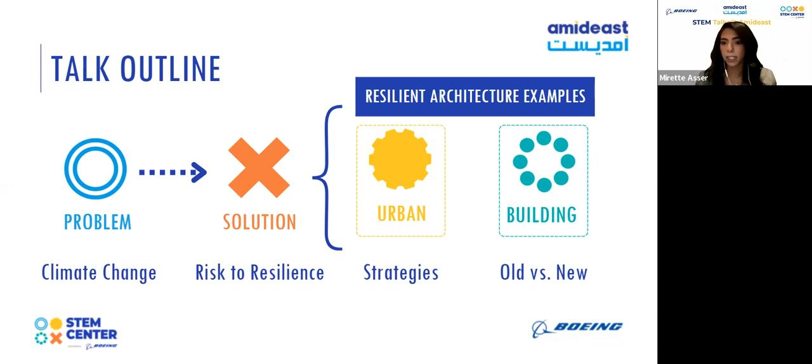Before we begin, I want you to imagine something with me. Imagine that you're stranded on an island, and this island is self-sufficient - you have water, you have food, and you have a shelter above your head. As time goes by, the water starts to get inside the island, it starts to devour at it, to the point where one day you walk out and your ankles are submerged in water. This is a very simplified metaphor of sea level rise due to climate change. It's not as harsh as I make it sound, but it's also not that far off from reality.

Let's take this mental image and put it in reality. We have coastal metropolises around the world - New York City, Sydney, Venice, Mumbai, and not even far off from here, Alexandria. These are all beautiful coastal cities, and as much as they all have amazing views and are heavily settled with a lot of people living around them, they're also threatened by climate change induced sea level rise.

So I want to ask you a question: do you think that all of these cities are going to look the same in a couple of years - in 10, 50, maybe 100 years? Naturally, no. But the reason behind the no is what we're going to be talking about today.

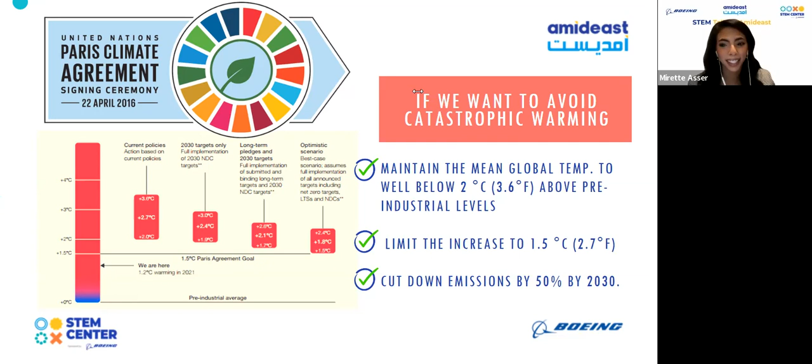Yeah, that's actually true, that's not the case. If we were to cut down all global emissions by tomorrow, we will still be dealing with climate change, because in a way some of that damage is already done and it's inevitable. That's not to say we shouldn't be heading towards more of a zero carbon or net zero type of construction — that's not what I'm saying at all. Besides, we should be doing that, but we should be looking at other things.

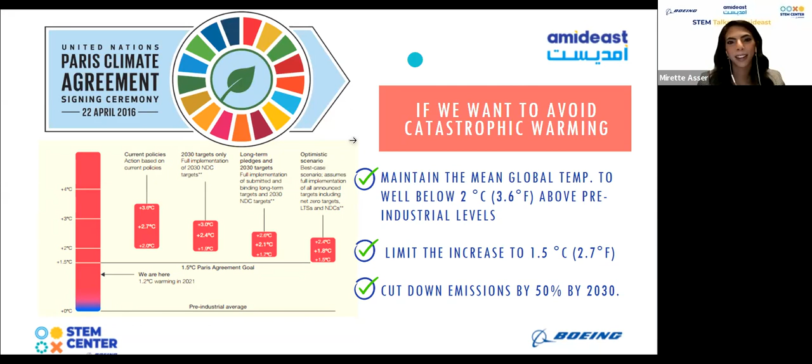So just like I asked you, the world without emissions is not equivalent to a world without global warming or climate change. So where does architecture come into that? Architecture's role in this is huge, more than we can ever imagine. The reason is because emissions are the largest contributor to the problem, and since they're the largest contributor, I can use it as a double-edged sword — it can also be the solution.

Buildings and the construction industry are responsible for three-quarters of all the carbon dioxide produced into the atmosphere. It utilizes 40% of the energy, 40% of natural resources, and consumes 25% of global water. Now if you ask me, those are big numbers. So just the building sector itself is responsible for this dilemma. But there are two types of carbon as well.

The reason they are that big of a percentage. The first type of carbon is embodied carbon. That is existent in the materials themselves. When you have concrete, when you have any type of engineered materials, they produce carbon into the atmosphere. That's just their natural life cycle. So that is embodied carbon.

The second one is operational carbon emission, which comes from the burning of fossil fuels in order to provide all forms of energy so that you can run your house. So your electricity, your water, any of that stuff. Since they already have a huge impact on the planet, we can utilize them for good.

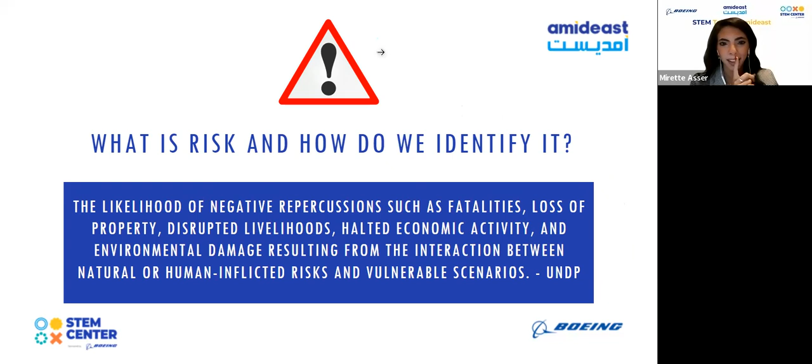Okay, so climate change is a form of risk, but we can call many things risks. Yes, you guys can all see the presentation. Perfect. Okay, so what is actually a risk and how do we identify it?

According to the UN, risk is the likelihood of a negative circumstance to occur or repercussions such as fatalities, loss of property, disrupted livelihoods, halted economic activity, environmental damage, resulting from the interaction between natural or human inflicted risks and vulnerable scenarios. So it's a mix of both. You have the human inflicted risks, the way that we live, the way that we construct, the way that we do most things that produce all these carbon emissions, and the natural causes in general.

So a natural disaster, as we've mentioned, the earth is dynamic. You have the shifting of tectonic plates, you have things that occur naturally. So a mixture of all of these lead to negative repercussions, and these negative repercussions are considered risk. Now, the reason why I'm telling you about risk is because it is a keyword to the way that we can actually solve this issue.

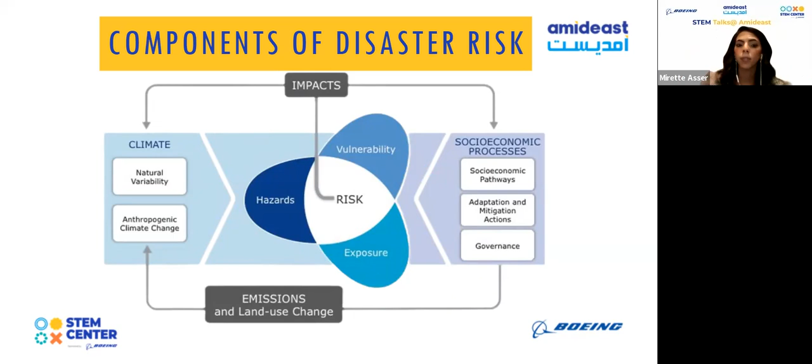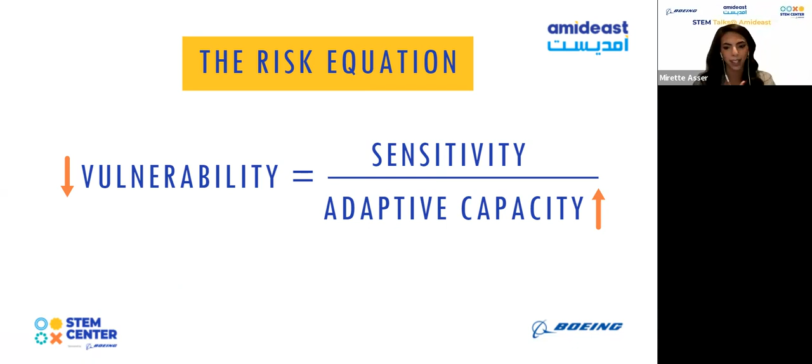And the way that we're going to be suggesting that is when we talk about it in the sense of architecture or buildings, we need to make the building adaptive or resilient. But we're going to get to that after just this mini.

So risk reduction through risk assessment. In order to really know what that risk is, to kind of grasp hold of it, you need to know how to assess it. And you do that through a set of 7 steps.

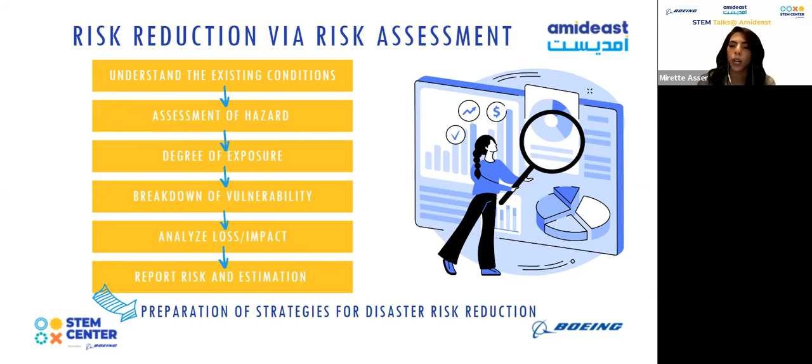You need to understand your existing conditions. So we're going to give an example of that. And then we need to assess the hazard, the degree of exposure, the breakdown of vulnerability. We need to analyze loss and impact. We report this risk and put all the estimates and statistics out there so that we can prepare for it through strategies, through planning, through design, etc.

So we're going to be giving a real life example here. Egypt's coasts are extremely vulnerable for so many reasons, but one of the main reasons is because of existing conditions of the Mediterranean coast, for instance. I'm just going to be focusing on the Mediterranean coast here.

So one of the main things that we have is low-lying lands. And by low-lying lands, I mean that they are just low in general. So if a little bit of water starts to increase, or the sea level starts to increase, it's bound to get flooded because it's already at a low elevation. We have plenty of that around our coast, and that's one of the main reasons why they're actually under risk.

So not only are they low, they are extremely densely populated. Throughout the world, throughout centuries, whenever we look at human civilization, we look at it around bodies of water because that's the natural way that civilization has come to be. You find water, that means there is plenty of room for resources and life. So we naturally put our settlements there. And as we've evolved, we have become overpopulated. So these coastal areas, not only are they low, but they're also densely populated.

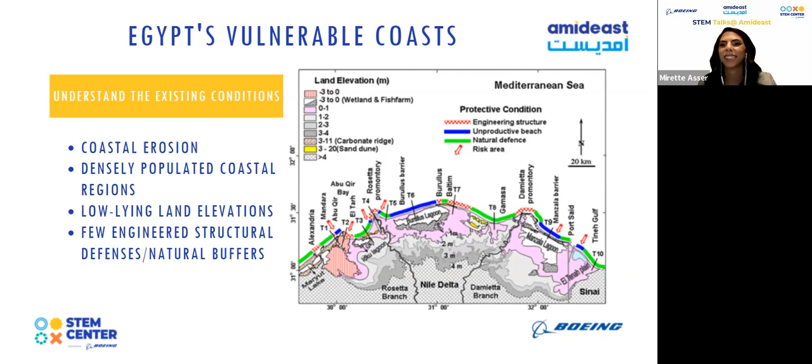And the last thing is that they have few engineered defenses and natural barriers. If you can see around this key, these are the only areas that have engineered structures, such as dams, such as protective engineering of dams or flood walls, etc.

So according to a report conducted, which identified the year 2000 as its baseline for its research, the population density in the beginning of the 21st century residing in low-lying areas was only 25.5% of the total population. But if we were to expect that the sea level rise is going to increase by year 2030 by 0.5 meters, which is actually the assumption for the predicted trajectory that most studies suggest, 45% of the population will be exposed. But if we wait a couple more, like 30 more years, then the scenario of the sea level rise up until 2100 is actually 1 meter.

So it can start anywhere around 2060 up until 2100. Those are all predictions as well, because that's the tricky part with risk assessment or with natural disasters or with hazards - you can't predict it accurately, you can't pinpoint it. So when we get to 2060 up until 2100,

63.5% of the population will be exposed to sea level rise due to the fact that they're just settled in low-lying areas and the population is increasing around these areas, these risk areas, these flood-prone areas, etc. That's almost 2.5 times the amount that was there just 60 years ago, or maybe 100.

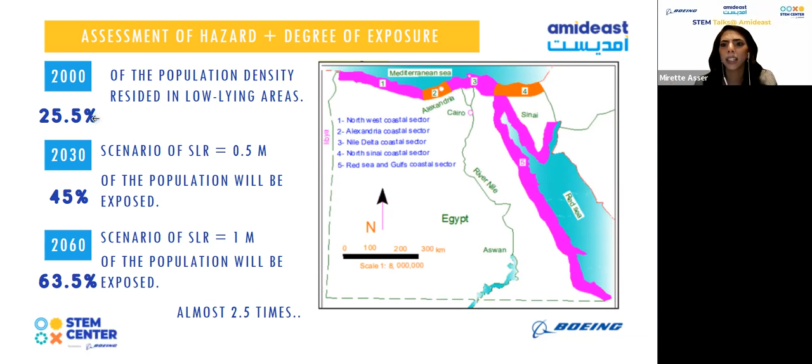Okay, so the breakdown of vulnerability. How can we say that it's vulnerable? Well, we say that it's vulnerable based on all of the things we just mentioned, but another thing is the contouring of the land itself. These are all aspects that tell us that these areas are going to be really exposed.

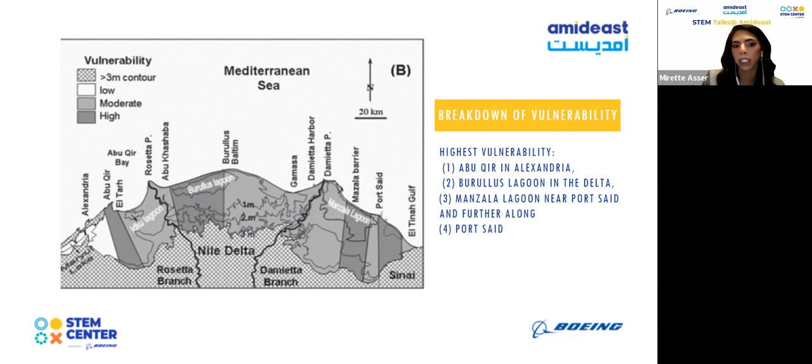But in the end, when we break down vulnerability, we're trying to give it kind of a hierarchy, or prioritizing the areas which are the most vulnerable. So the areas that are most vulnerable are as follows: Hayrat Abu Qir, which is in Alexandria, Burullus Lagoon, which is in the Delta, Manzala, which is near Port Said, and further along Port Said. Those are all considered the high risk areas. From now on, not in 30 or 60 years, they're actually under high risk from now.

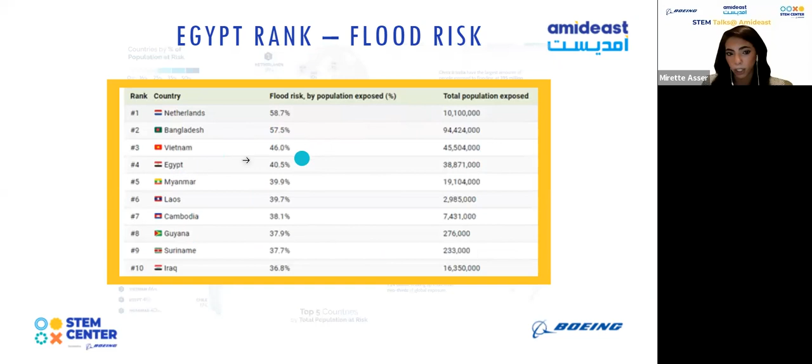Which brings us to one of the scariest statistics, but we're going to stay hopeful. The scary statistic is that Egypt ranks 4th in the flood risk parameters, 4th around the world. 41% of its population is actually exposed to flooding, which you can tell here that flood risk by population exposed is 40.5%, which exposes almost roughly 40 million people.

But that's not to say that Egypt isn't taking steps in the right direction. We've recently had the Egypt National Climate Change Strategy, developed in May 2022, set forth for 2050. The strategy promises the development of an interactive map which will aid decision makers in identifying areas most susceptible to risks, especially those related to climate change, in a more accurate way, so we can take appropriate action.

Another thing is, I'm sure all of you are aware that COP27 was just held in Sharm el-Sheikh almost a month ago, and that was a huge step for climate action around the world, because this was the first time COP was actually held in a developing country.

During this year's conference there was something called the Clean Construction Accelerator, which was announced. This is an act that hopes to support the built environment sector in halving emissions by 2030 for all new buildings and infrastructure projects, which is a great step for architectural practice around the world.

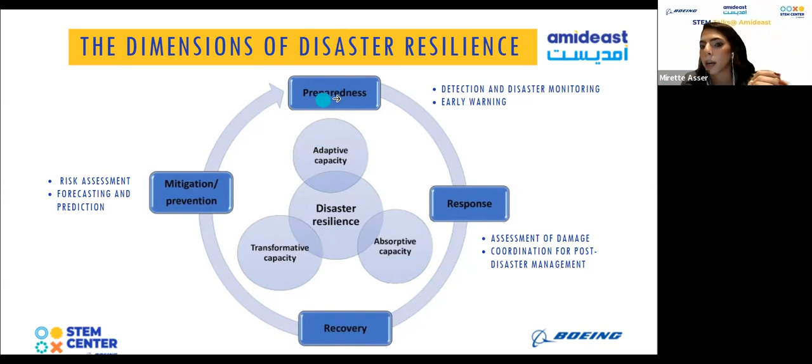Okay, so can we measure resilience? Most of the time, when it comes to the climate change research area, a lot of things are tricky to measure or add numerical value to. For us as engineers, we work with numbers, statistics, percentages, all of the above. But when it comes to something hard to predict, a lot of initiatives are actually trying to measure resilience.

This is the BRI, the Building Resilience Index. It is actually an attempt to solve this challenge. The International Finance Corporation, the IFC, has developed this index, and it's an online tool and a self-assessment framework that you can utilize.

If I have any architects here, you're well aware of rating systems such as LEED, BREEAM, or the Green Star even. That's a way of rating whether your building is sustainable or not. But the new narrative is to rate it or assess it in the sense of whether it's resilient or not.

So this online tool uses a standardized letter grade rating system to evaluate the building's capacity to stand up to shocks, and it continues to function in the sense of its structural integrity. There are so many factors. I do invite you all to actually check it out and see it - it's up online, a very interesting and intriguing system, and this would really benefit the overall trajectory towards resilient design.

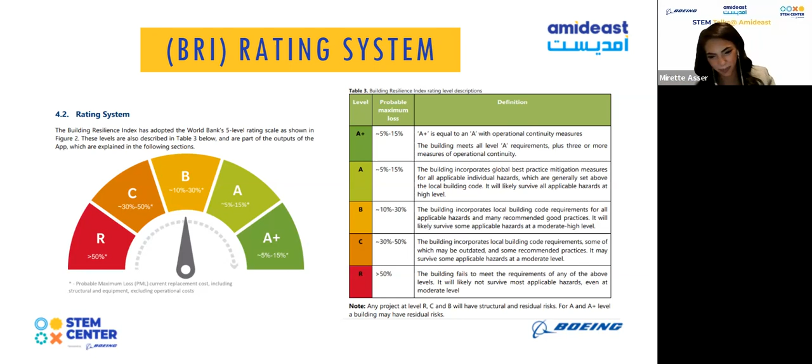Okay, so we're at the last but not least part of our talk, which is flood resilient architectural examples. There are plenty of examples - most of them are conceptual, some are in the form of strategies, some are in the form of standalone research projects. But I tried to gather as much as I possibly can on an urban scale and a building scale so that we can go through all these different examples that show us how we can respond.

The first one is based on urban scale strategies. There are 9 main urban scale strategies. When we look at this, we consider an urban area where we're still going to construct—it's a new urban development, not something existing. It's important to note that if something is existing and we're trying to adapt or implement something onto it, that means we're retrofitting. I'll be using that word a lot, especially for the building scale, so I just needed to clear that out. This is something absolutely new, a new development.

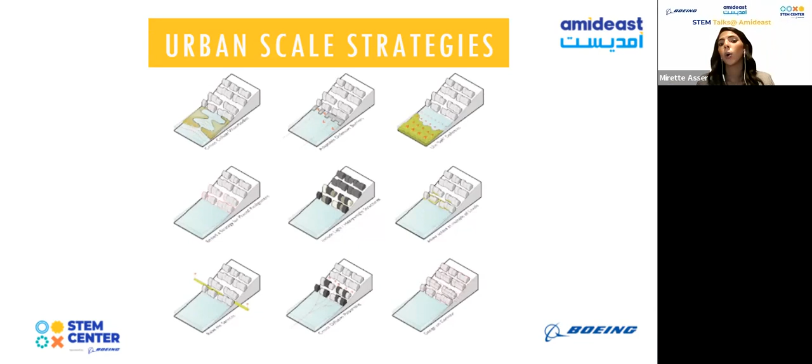So you have 9 ways in which you can protect this neighborhood, city, or coastal area from an expected flood. The first is cellular water bodies. The way to do that is to design the water itself, having an area in your land which acts as a pool. When the flood hits, it can transcend in between it. You use these blue elements to integrate them with your landscape and urban environment.

The second one is to use soft defenses. You can literally use trees as buffers. That sounds very simple, but with time, throughout my research, I realized that the simple techniques are the ones that work best.

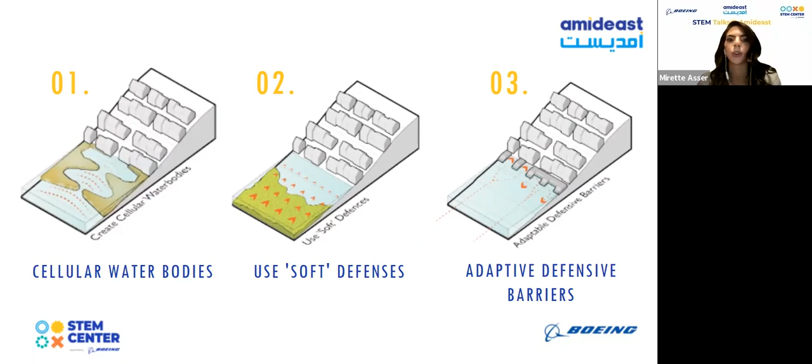Because they're natural techniques specifically—most of the time, when we have differences in currents and bodies of water around us, we have coral reefs down there. The ecosystem itself helps to regulate that for us. But because of our impact on them, there is a lot of turbulence and imbalance. So that leads us back to it—it's a full circle, we go back to using soft defenses and natural resources.

The third one is adaptive defensive barriers. We can use engineering techniques—these are called hard engineering defenses. There are soft ones and hard ones. The adaptive defensive barriers could be flood walls, almost like a dam, but redefined and on a smaller scale.

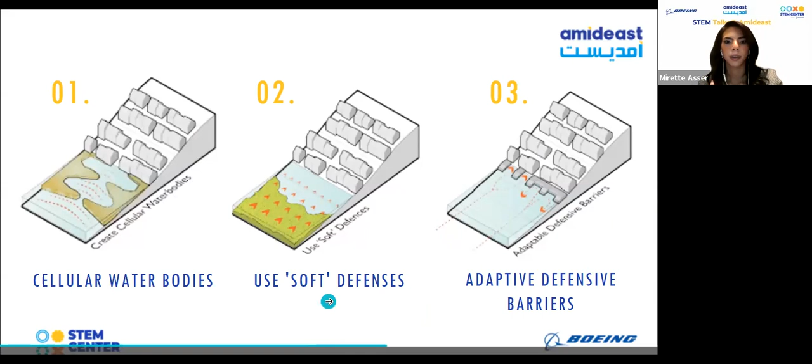The fourth one is phased realignment. This is a strategy we could use on an urban scale. For instance, we have this urban city on a slope. What we do is place these buildings in a zigzag way. So if water floods this area, it will go in between these little grooves that we've created using design.

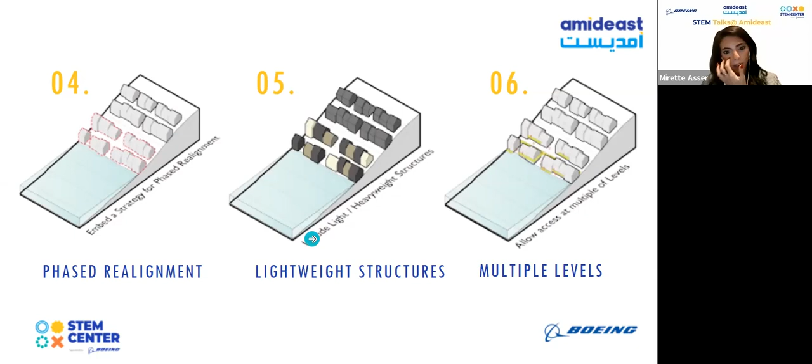The fifth is using lightweight structures, and we'll elaborate further on why—contrary to what you'd think, if something is light it won't be as effective from an impact. Actually, when it comes to coastal flooding, that's not the case. You want something light, using something called buoyancy, but we'll get into that further on with a better example.

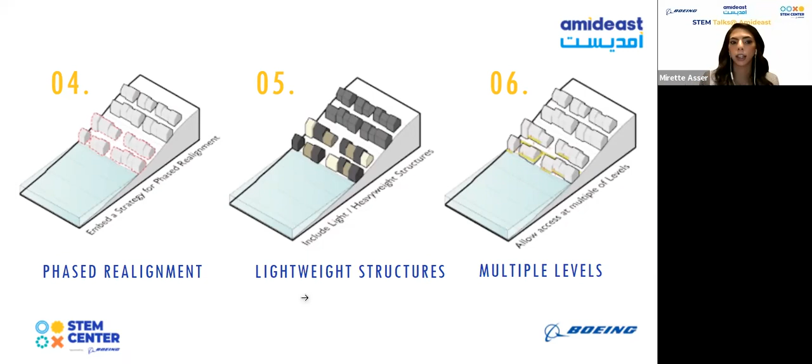The sixth is working in multiple levels, and not just multiple levels—you need to prioritize them. For instance, the first line in front of the risk or body of water should be prioritized to areas or buildings that are not utilized all the time, temporary buildings, just in case anything occurs. These frontliners take the impact, softening the blow as it goes further into the urban landscape, but even the damage to them doesn't cause casualties or anything drastic—the loss or impact is minimized.

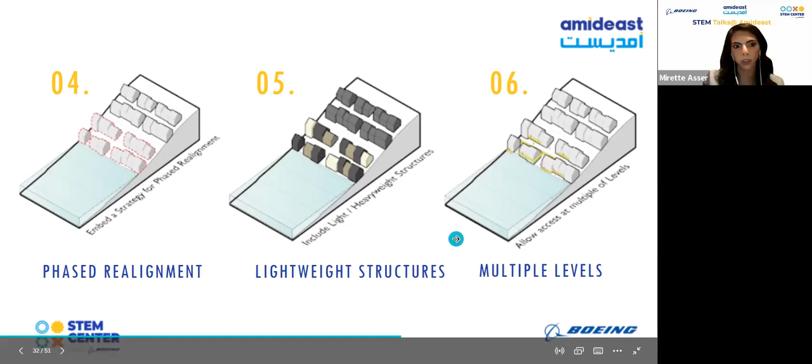We have raised services. One of the most important things we need to highlight is services and infrastructure. In the case of any disaster around the world, the first thing we try to contain is critical infrastructure—roads, emergency access, electrical units—because once the power is out, a lot of things go out with it. So raising the services, especially the ones necessary for operation, for the buildings to stay operated, is extremely important. The way we do that is just to make sure they're above the flood level.

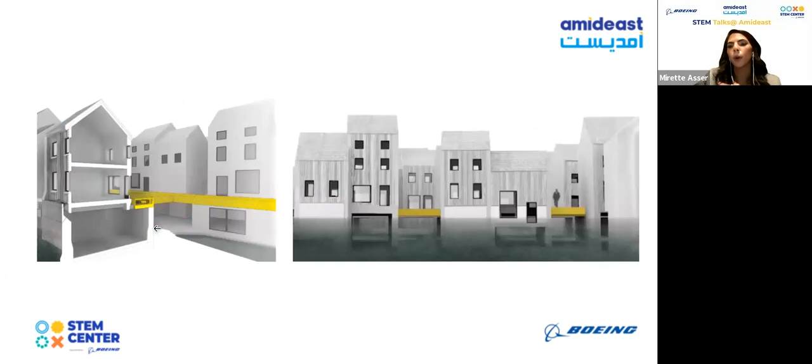So if this is the expected flood level and I'm compensating for that by providing a basement that could actually hold this water for a while, then I'm going to make sure that these services are placed on top of it.

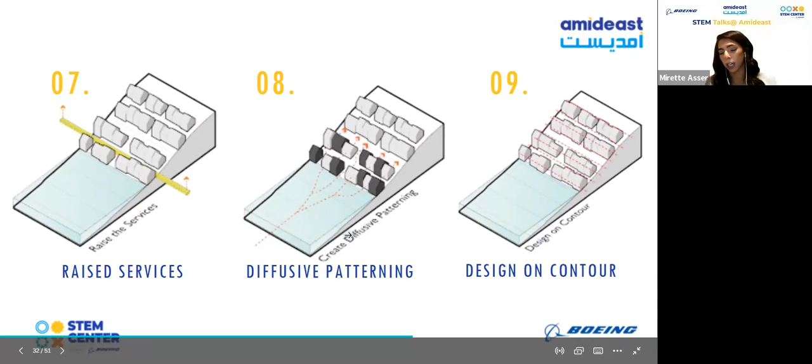Diffusive patterning is another way of realigning the buildings, which ensures that the stream of the flood is diffused, and as it goes across these buildings, it starts to lose its momentum. Finally, designing on contours using the natural contour of the land, because the contour is there for a specific natural reason—it's just the way the land was created—and we can utilize this naturally occurring contour in order to build different levels with different priorities and building usages.

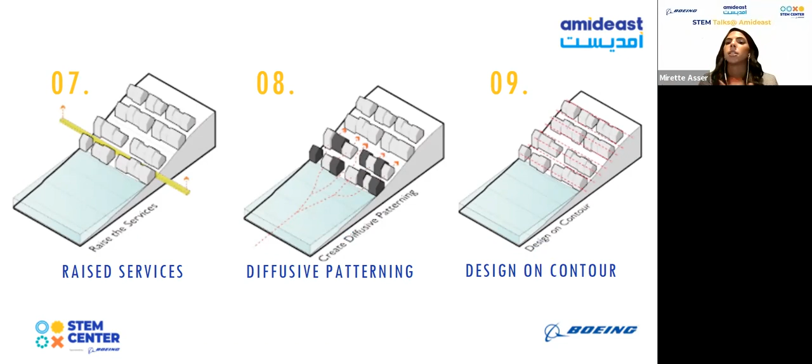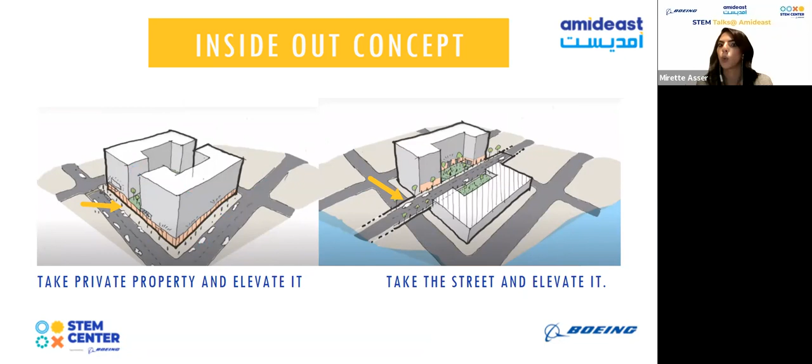Another concept is something called inside out, which you can take the private property and elevate it, or you can take the street and elevate it, whichever, or both. However, this is very difficult to retrofit. In that case, you would have already planned, expecting that in a couple of years there could be floodwaters, and you're designing in order to completely mitigate the impact of these floodwaters. So it's not something you can retrofit later.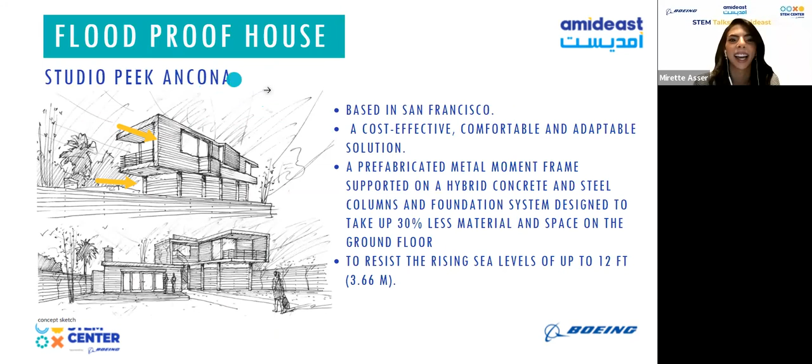This was a cost-effective, comfortable, and adaptable solution to flooding. What they did is use prefabricated metal moment frames—prefabricated meaning they've already been constructed, produced and manufactured, and all you need to do is transport them onto the site. They're supported by hybrid concrete and steel columns, and the foundation system is made in a way that uses 30% less material and space on the ground floor.

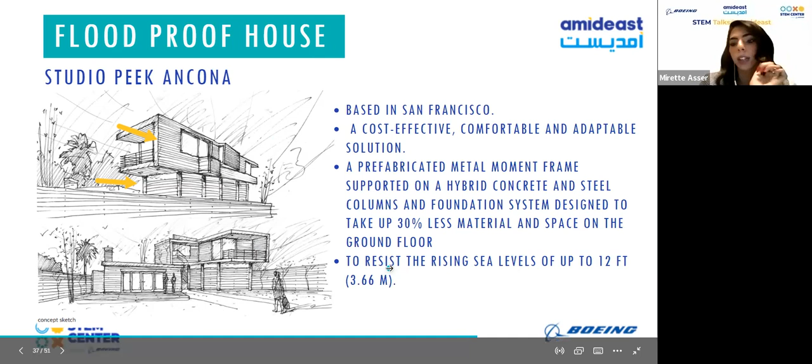So if you recognize a pattern here, elevation is always a way to adapt and become more resilient to flooding. It's expected to resist rising sea levels of up to 12 feet, or 3.66 meters. The structure system itself allows for easy construction because it's prefabricated, and easy transportation since it's already pre-made. The installation process is simple, especially with prefabricated units—it's more like a Lego, you just place them together and they're done. You just constructed a building. And they apply local materials, so it's site-specific, adding this site-specific quality to the architecture.

Now, the truss assembly contains a cantilever. A cantilever is, for instance—how can I describe it—your balcony is a cantilever because it doesn't have columns, it's just horizontal, and there's a specific distance where the structure can support itself, freehanging. It contains these stairs—external stairs onto a cantilever, like a balcony—which provides a point from which the unit can be easily expanded and combined.

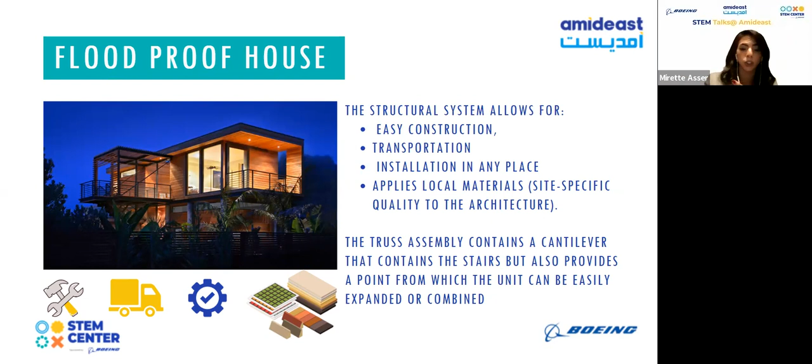So the structure system works like a Lego, and the entire form or building works like Tetris—you can put a couple of them next to each other. The prefabricated metal unit is within the structure system, set on a pair of concrete and steel columns, but secured by a rebar-reinforced foundation. In a flooding situation, all of the water would be coming in this direction.

So the staircase, or the main axis, is not trying to go against it, and the water can just flow through it.

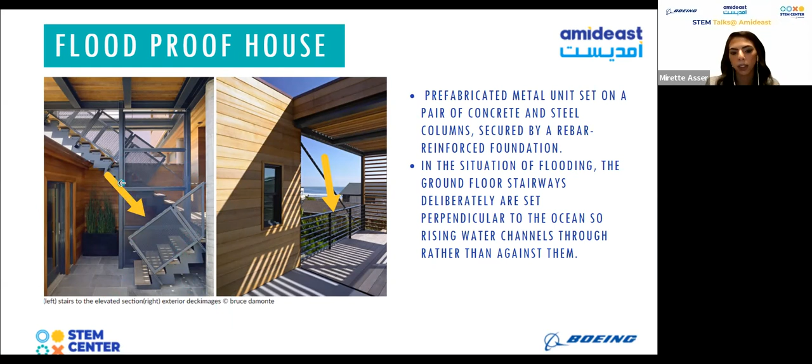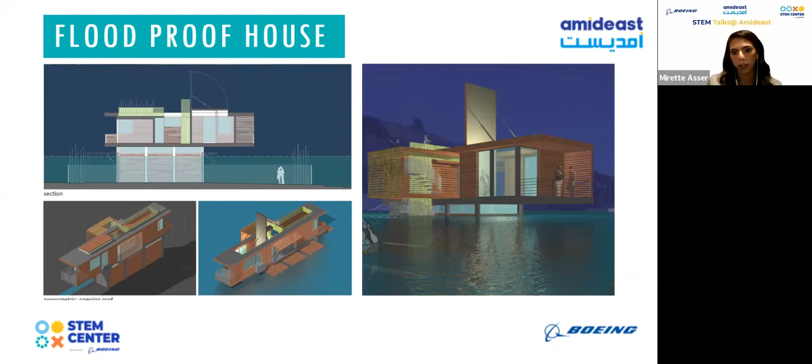So the water, when it flows through, it flows through this area, which is considered the basement area. This is where I'll let the water get in and out. I'm just going to wait it out until these places start to dry out, and then in the end, I can use these floating surfaces to regain access to the rest of the area. This is another way of suggesting the same kind of thing, but it's called the amphibious house.

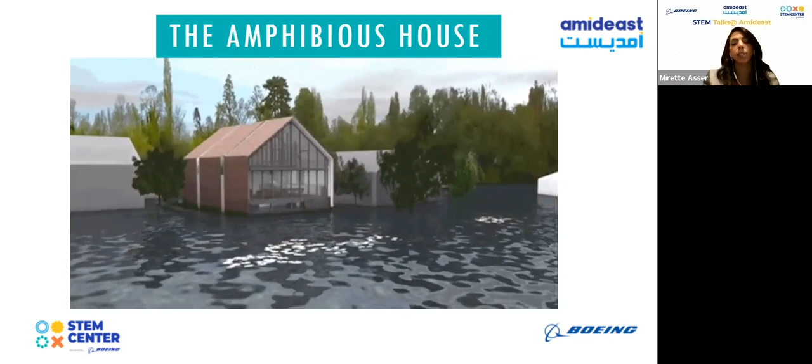The reason for that is it's actually placed on a dynamic platform which rises with sea level rise, and in a form, it acts like a boat. So the second the water enters into the basement level, it starts to provide stress upwards, and the structure will move and float. That's why it's called an amphibious house, because it can live on and off water.

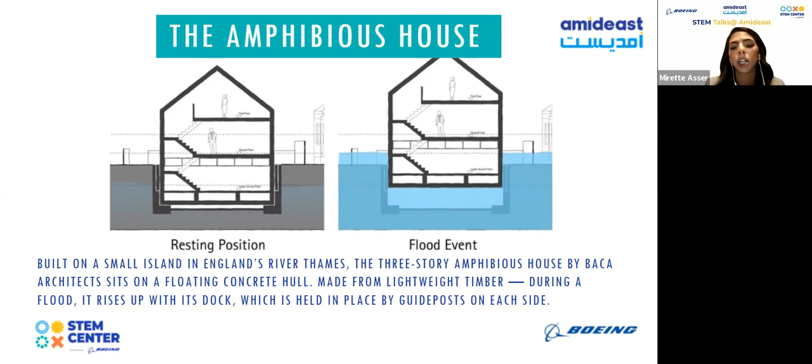So this is your resting position. As soon as the flood water starts to enter the basement level, it starts to float upwards. This is actually built on a small island in the River Thames in London. It's a 3-story house made by the architects Baca Architects, and just like we mentioned, it floats the second any water enters its basement, and it's heavy enough to lift the structure up. It's made of lightweight timber, and this is one of the reasons lightweight structures are the best thing we can have in flood-prone areas.

So one of the best things we can do is elevation, raising your house so the lower floor is above the flood level. You can do this in many ways - you can provide a gateway so the water can get through, you can raise it on pillars, or use different types of materials or water intrusion and extrusion strategies.

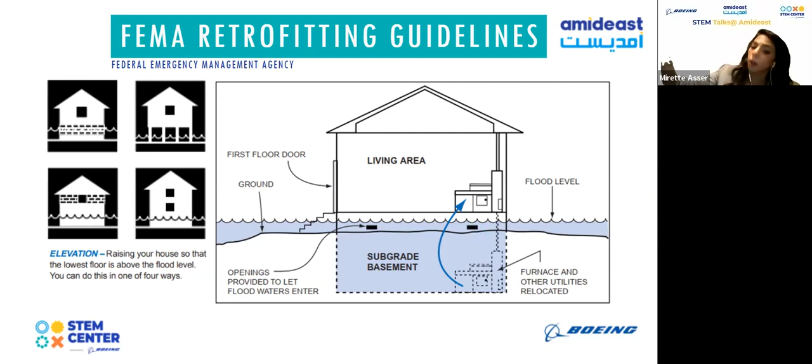So for instance, this is an example. You have a subgrade basement, as we mentioned before. You make sure the level of the ground floor and all the necessary MEPs - mechanical, electrical, and plumbing - and the services that keep your building operational are above even that level. There are different types, but they're ranked in a hierarchy: wet floodproofing, relocating, dry floodproofing, flood walls, and demolition.

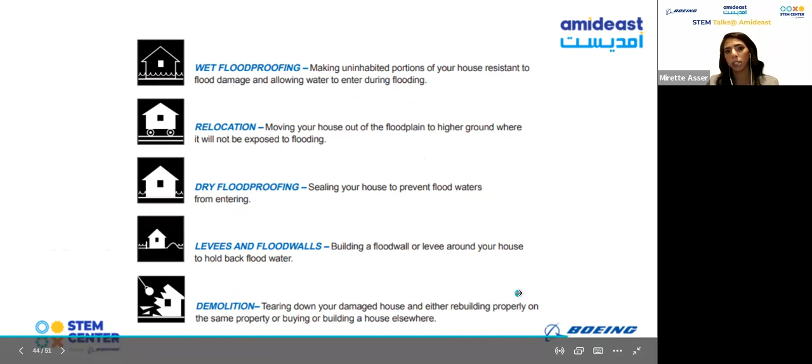Of course, we never want to reach a point where we need to demolish an area and take it somewhere else.

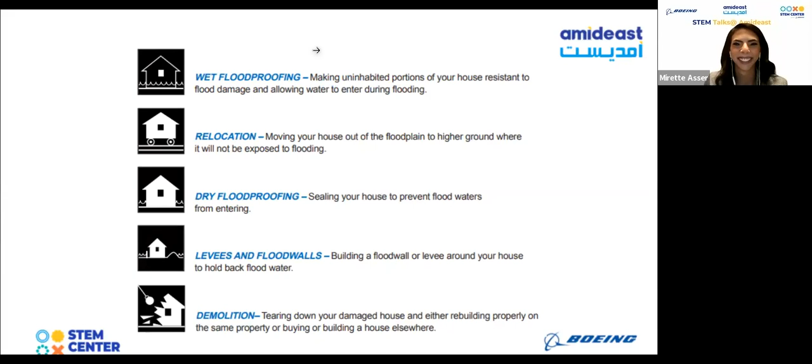Thank you so much for your comment. Dr. Safa, thank you so much. Most welcome, you're most welcome. It's very, very informative, thank you so much. Thank you for attending. This is the pleasure is all mine, really. Okay, I'm going to wrap this up. I promise, I'm not going to keep talking about this for long.

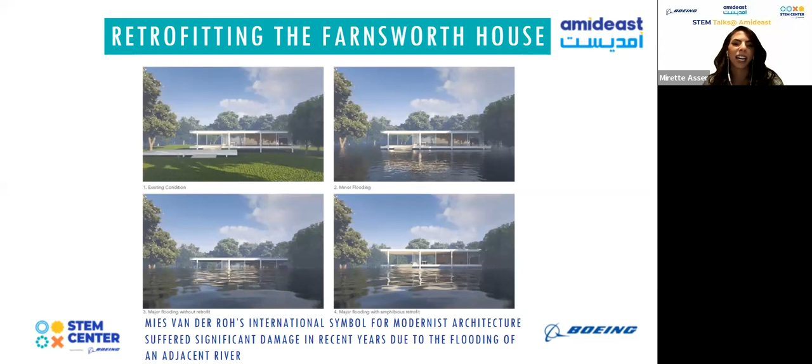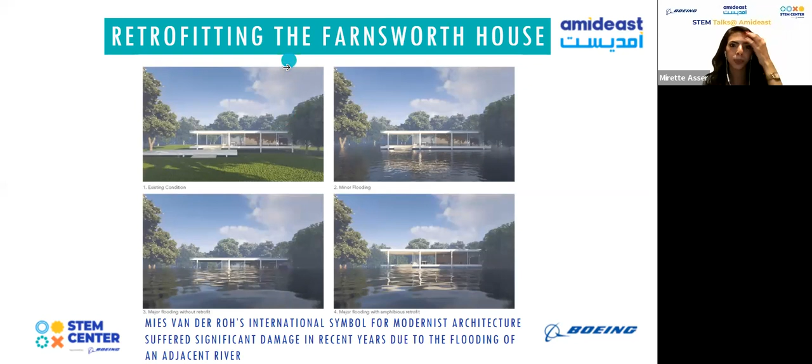But this is another example of retrofitting, in the context of preserving something which is very impactful. For instance, this is a very well-known building by Mies van der Rohe. It's iconic when it comes to modernist architecture.

Sammy, what about the existing building, which is not designed using any strategy? Okay, I'm going to get to that right away.

The way you can actually do that is through risk assessment, to analyze the kind of things you have in the building itself, whether it's material or the structure system. You need to assess all the existing integrities of the structural system, the materials, and so on. Then we work with it through material science, such as absorptive material, waterproofing, or damp proofing, or a form of water intrusion and extrusion strategies where you find a way to have a gateway for the water to be extruded. That's all you need, to protect the rest of your services or necessary operational services.

Thank you so much for the answer that you gave.

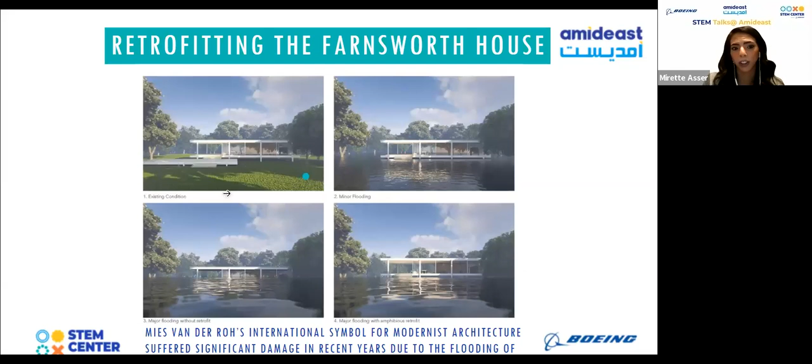So this is actually another way of doing it. It's just kind of like the amphibious house - it's a platform which is diamond shaped, a below-grade installation. You can excavate the land underneath it, place this installation, and it would raise and float the house in case of extreme flooding.

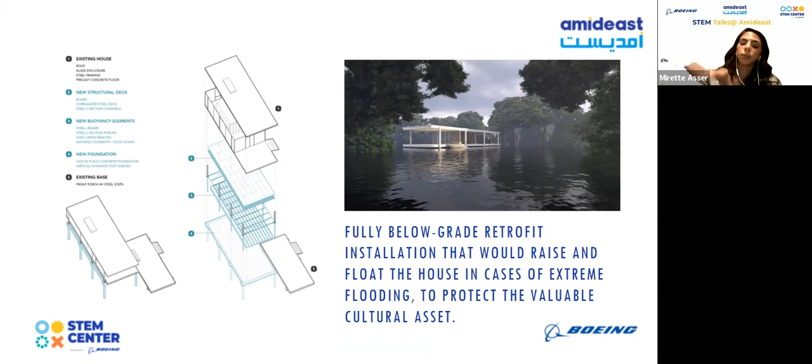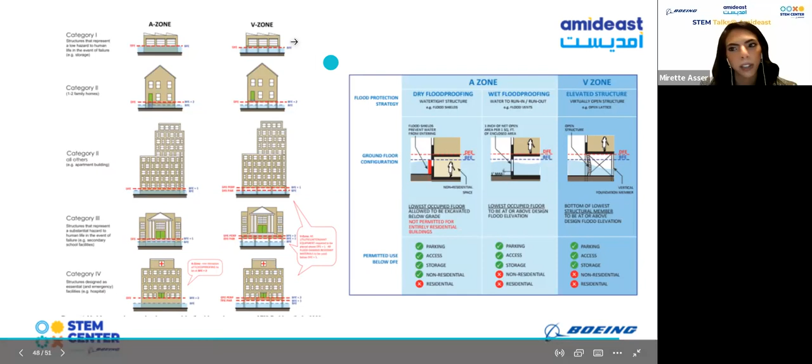So they tackle resiliency in the form of multiple levels of the society itself. And this is actually a good example to answer your question.

When you mentioned how can we already do it for existing areas - if you have a basement level or a ground level, this level could be transformed into dry or wet proofing according to what you might need. For instance, you can add bracing to this level. You can completely cut off the ground level, revert all the systems, and make sure that the ground level becomes an area where the flood can come through and come out of, while the level above would be like in skyscrapers, where we have a mechanical floor where all the services are. So this is another way of adapting something existing that doesn't take into context the fact that it has floods coming in the future.

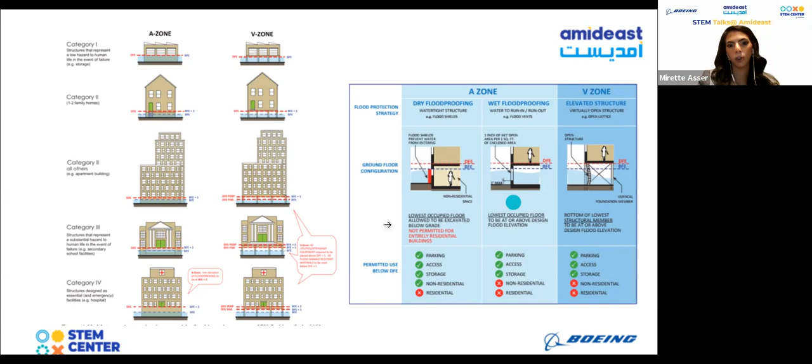So to summarize, when we talk about urban techniques, we can talk about hard or soft defenses. This could work on an urban scale, and of course with buildings too. In the sense of soft defenses, such as landscape, different types of trees and plants that need a lot of water, they can act as very protective buffers. We can use zoning for the urban scale so that we place areas in different hierarchies according to the threat and their importance to maintaining everyday life. We can try to utilize water intrusion and extrusion strategies, a way to redirect the flow of water. We can elevate the structure, and we've seen that a lot, and we can use buoyancy, which is the ability to float.

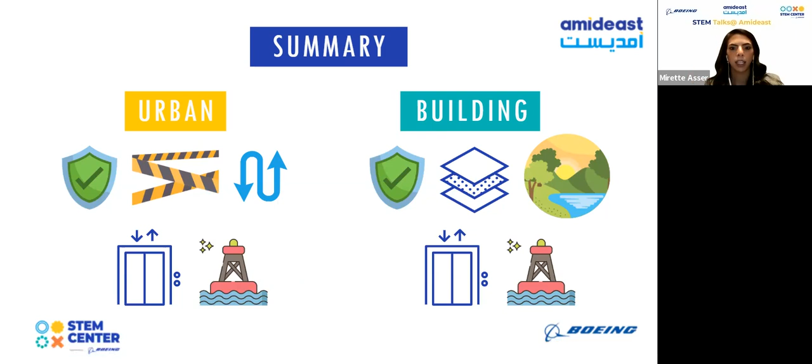Actually, I'd like to thank you very much. I have learned a lot. I enjoyed every minute in this presentation. You are a perfect presenter, by the way. Thank you so much, the pleasure is all mine. Really, and you make it very easy - you presented the problems, then told us how to solve such problems. This presentation is highly appreciated, and your time is highly appreciated. Thank you so much, and keep going because you are perfect. And I hope you have the best future you can have. Thank you so much for your time. Thank you for your kind words. This is honestly more than I could have ever wished for.

Thank you so much. Welcome. Thank you, Justina. I'm not really sure when I'm going to be presenting more talks, but I'll let you know for sure. Thank you so much, Shiali. Thank you, Mai. And thank you, Mahmoud. Thank you, Rowan. No one has any questions? Are you guys sure? You answered them all because you are a perfect presenter. Thank you, that's so sweet. Thank you so much. All right, I think our talk is concluded.